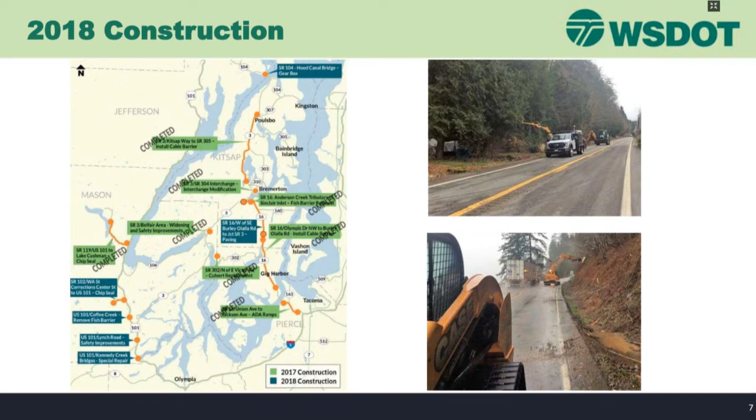Things like the Belfair bypass will be picked up at the end of the 17 to 19 timeframe, for instance, so that's a big investment.

So the Belfair Widening Safety Project on SR3, this is a job that a lot of people who live in Belfair endured for a very long time, and if you're one of those, I thank you sincerely. We started talking about this a long time ago. The funding was sort of turned on and off, and finally the funding was provided to do that job.

It's on the order of about $20 million.

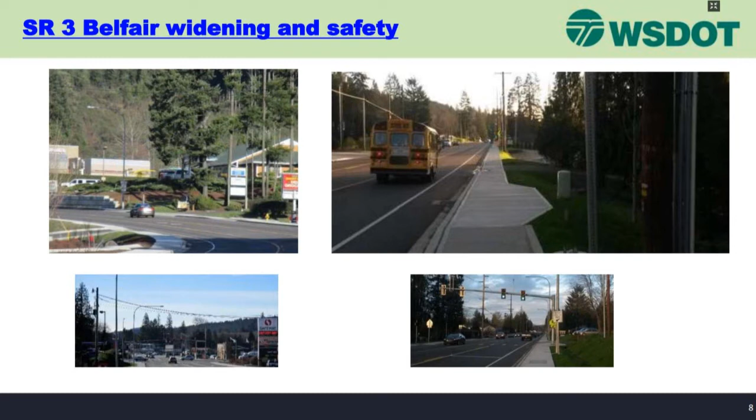That job added sidewalks, extended the left turn lane, put in stormwater treatment facilities, updated lighting and signals. I was invited to go to the ribbon cutting, and on the way there I saw like 4 people walking through town in Belfair on a sidewalk. It was amazing. There were a couple of people on bicycles on the side of the road. I think this turned out to be a great job, but between the utility relocations and all the construction, it did take a long time, and we appreciate everybody's patience. It seems to have turned out pretty well.

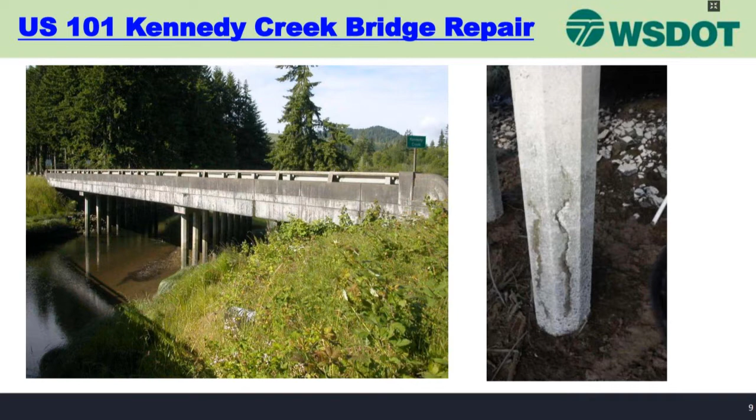We inspect our bridges on a regular basis and identify what needs to be done to keep them up to code and in good working order. So there's going to be some column repair work done on that bridge. Our bridges are generally designed to last 75 years, but with regular maintenance we provide, they last significantly longer in many cases. This job will mostly have trucks coming in and out of the area, but should have very little impact on actual traffic flow through 101.

On 102, the Dayton Airport Road, the road that goes out to the State Patrol Academy, we have a maintenance facility out there. There's the prison, there's a racetrack out there. This road will be chip sealed, done during the day. It's a great way to seal the surface to preserve its life, but it's an iterative process - you go out and put the rock down, put the oil down, then come back and stripe it. You'll see this going on that little piece that, until a couple years ago, I didn't really understand was a state highway, SR 102.

Fish culverts - we have a huge need for replacing fish culverts. About 3 years ago, the state was found liable to replace about 900 culverts on the west side, mostly between the Canadian border and just south of Olympia, to allow for fish passage. We were directed to complete that in 16 years. It's well over a $2 billion effort. It's not fully funded, only partially funded, so we're knocking these off as fast as we can.

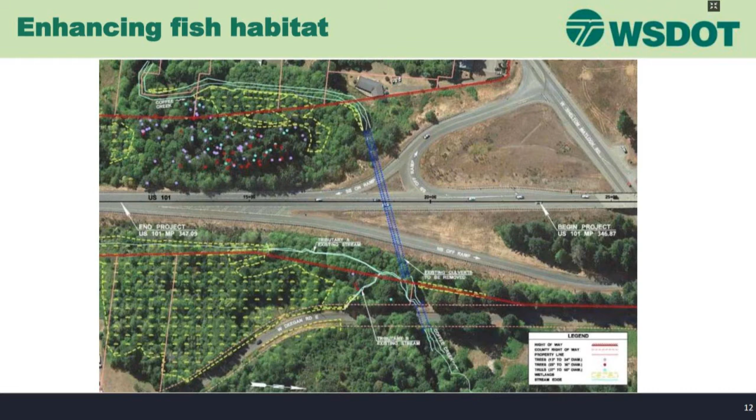We're negotiating with the contractor right now on some ideas they have - how this could come together, what this culvert would look like, and some location issues. You'll see this work starting probably this fall and continuing realistically through probably next summer and a little longer.

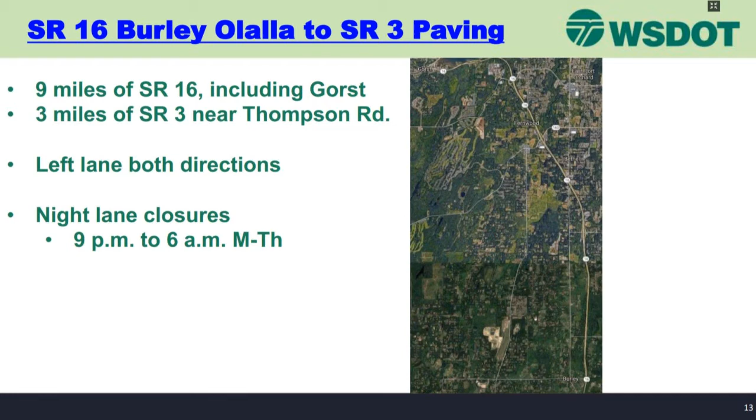We're going to do some paving on 16, left lane, both directions. The right lane was done a few years ago. This will be primarily done at night - most of our high-volume roads we pave at night. It's about a $2 million project.

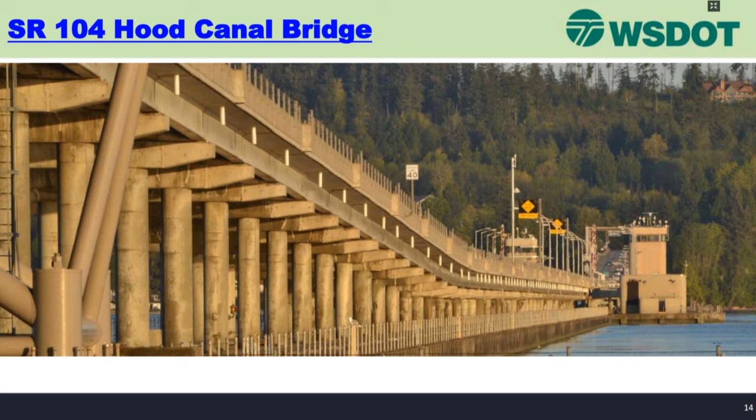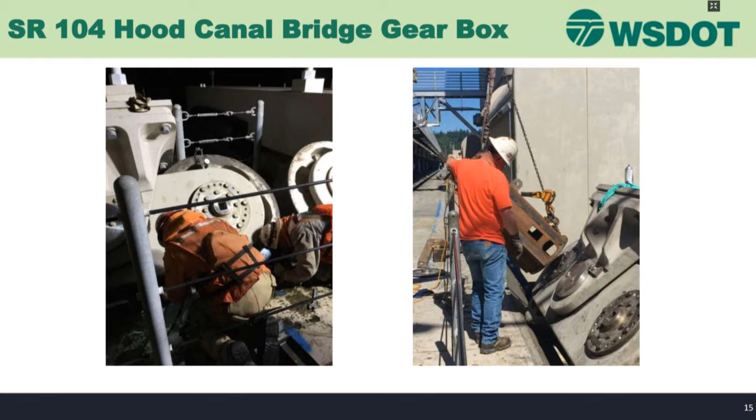Those rollers take a lot of wear and tear, so we're replacing those as well as updating the gearboxes that drive that operation. And that's one of the gearboxes right there.

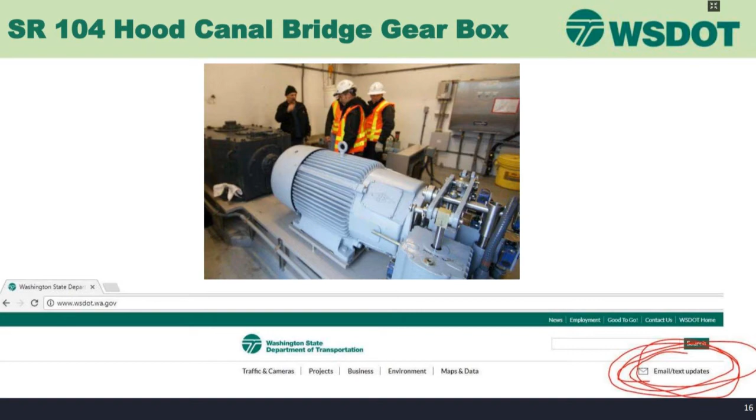If you go to our website, along the bottom of the screen, that's a screen capture of the top piece of a web page. There's email and text updates. If you go to one of our web pages and see that, you can click on it and subscribe for information on various topics. The Hood Canal Bridge will get you closure information, Tacoma HOV will get you information. So you can get into the system to get email and text alerts on various programs, activities, and places. Just be prepared, because some of them overlap, and you could wake up and find you've got 40 new text messages and 200 emails, so choose wisely.

101 at Lynch Road is a project I think a lot of you are interested in. We've been talking about this for a while, working with the county on it. It's proving to be a bit of a challenge, because we originally had discussions about building a frontage road from Taylortown down to Kamilche. We worked with the county on that, and they did some work on it. At the end of the day, we got funding from the legislature to build an improvement there, but that funding wasn't enough to build a frontage road. In the interim, talking with the county, neighbors, property owners, and the tribe, it turned out there wasn't as much support for a frontage road as there was at one time.

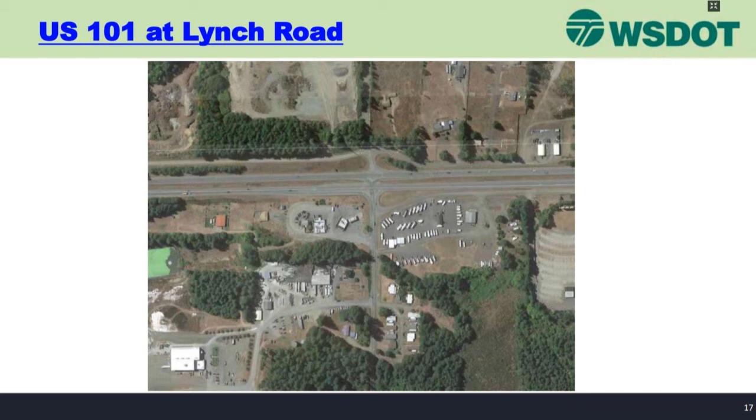So we went out and met with the public, brought some displays, asked questions, met with the county again, and met with the tribe. We're looking at potentially making improvements to the intersection itself, or providing another way to make left turns. We're preparing to go talk to the county commissioners in the next few weeks about the plan. The bottom line is, we were hoping to build something this summer, but it's likely that it won't be till fall or maybe a little beyond that, as we work out the best solution within the budget we have. So we'll be going out and talking to the public again about this project.

That went to 3 in '16, so each of the 3 that year involved an injury. Our goal, of course, is to continue to drive this down. The good news is that as we made changes out there, looked at speed limits, and added turn lanes and other improvements, it has gone down, but there's more work to do.

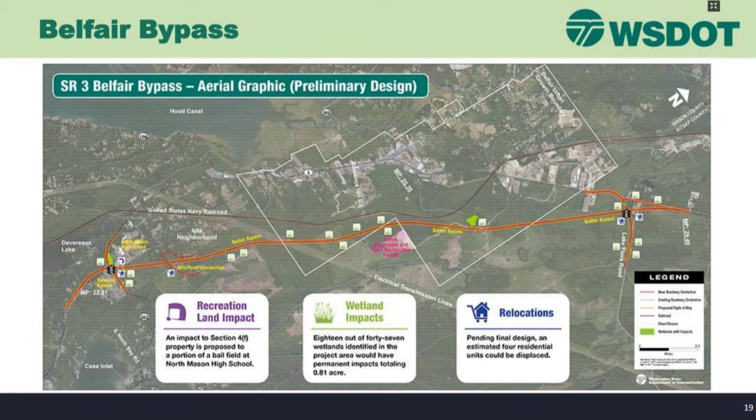We have an environmental document that was completed on this, but due to the time span, it'll have to be updated — there's been a lot of work done on it already. There's been an alignment identified, so we're preparing to come out and start our public engagement early, and then jump into this hard when the funding is available. And that's all I have.

So, do you want to do questions or bring up the next speakers? No, you have time for questions. Okay, so what questions do you have for me?

On the Belfair bypass, how many off routes or offshoots are you going to have? In the original design, we said there was a possibility to put a midpoint connector in, but this is envisioned as being a limited access highway. In other words, there will not be driveways off of the bypass every several hundred feet - this is meant to be a true bypass. But if you live on 106 and want to take the bypass to bypass Belfair, is there going to be an offshoot for that? I don't know that. I think the city and the county have engaged a consultant to start asking those kinds of questions - I was told discussions were going on about connections and what they would look like. So I think those are all things to be determined going forward.

Yes, sir. A few years ago, there was a bridge out by the reservation that many of us liked a lot, but it was torn down and replaced completely rather than repaired. Just high level, what are some of the considerations of whether to repair it versus just replace it? And is there usually a public outreach effort to get input from the community in a situation like that?